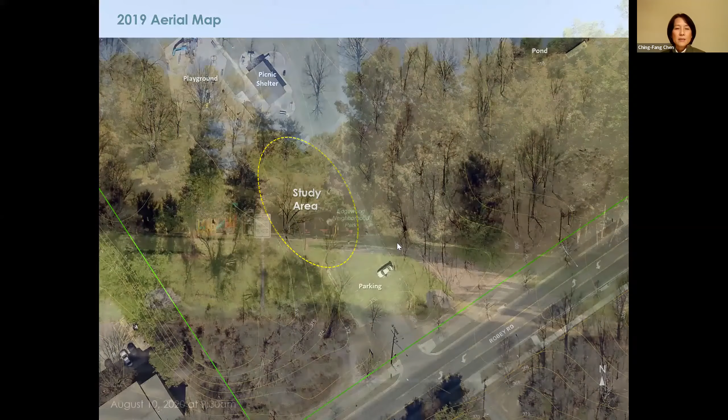This area is flat and open and is near the park main entrance and parking lot with picnic shelter and playground and the main walkway nearby. It was identified as a suitable site to introduce a community garden. And north is up. This is a summer morning photo of the space.

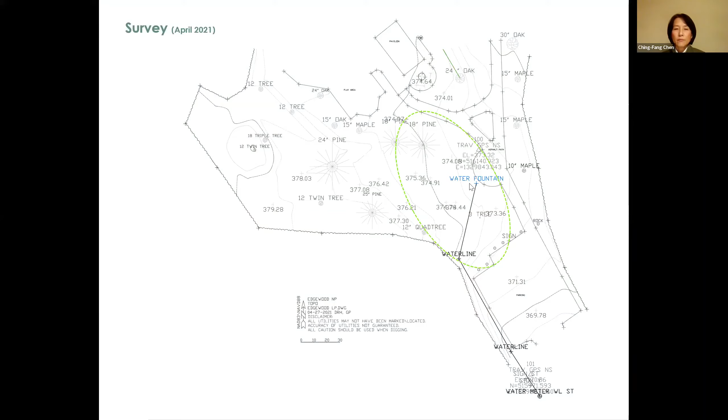This is a survey. As you can see, there's an existing drinking fountain and the water line. The overall area has about 4 feet of grade change. And there are a few insignificant trees surrounding the area. And the plan is to remove the 2 white pines that are in decline, and also this black cherry, and to relocate the black gum to allow more sun exposure.

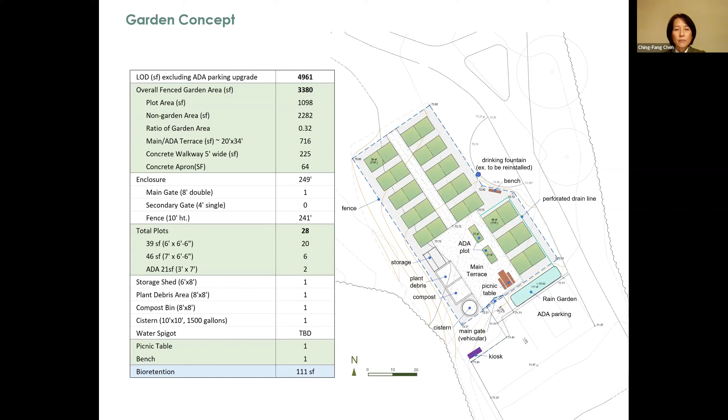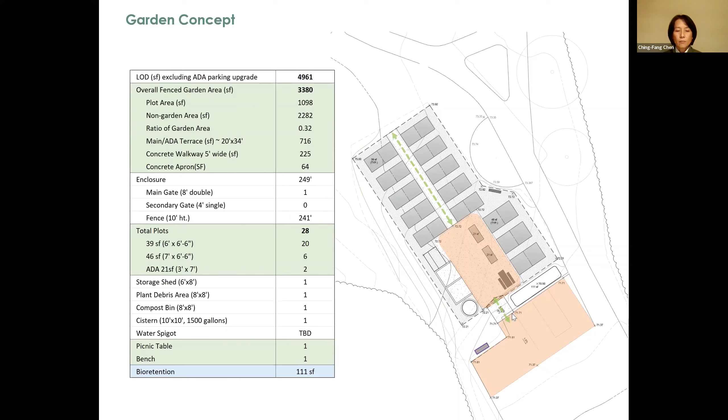You can see the orange highlighted areas are the very flat areas and organize and connect to this main walkway and the parking lot. And the design intends to allow visual connection from the parking lot to the picnic shelter.

And the intent is to use some sort of edging to contain the growing area to keep the walkway clean and organized. And the accessible garden plots can be combined or individually located with at least a 5-foot diameter turning area. So in this case, the plots are separated, and this option shows the plots are combined. It will allow us to incorporate another picnic table.

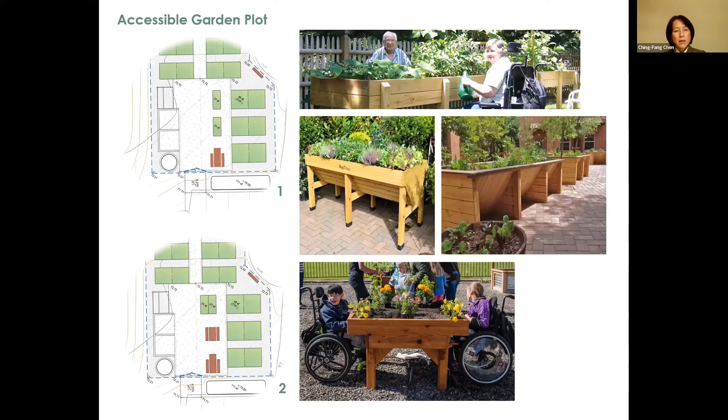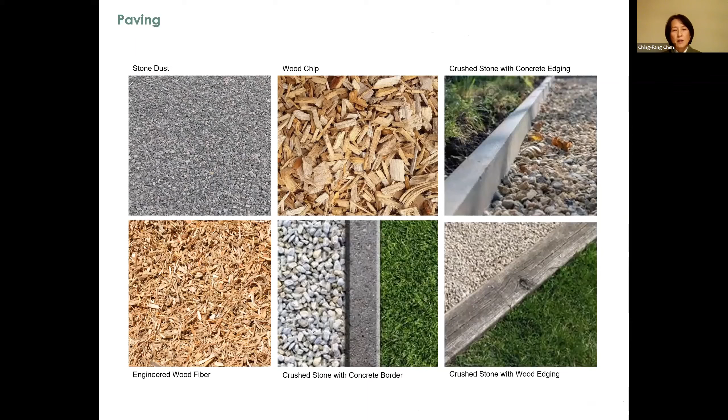And the team explored materials for paving and edging that can support day-to-day operation and are sustainable and affordable, such as stone dust, wood chip, gravel with concrete edging, wood edging, engineered wood fiber, or crushed stone with concrete border. We haven't decided yet, but these are the materials we're looking at. And for any loose material, we recommend having some kind of geogrid to provide subgrade support.

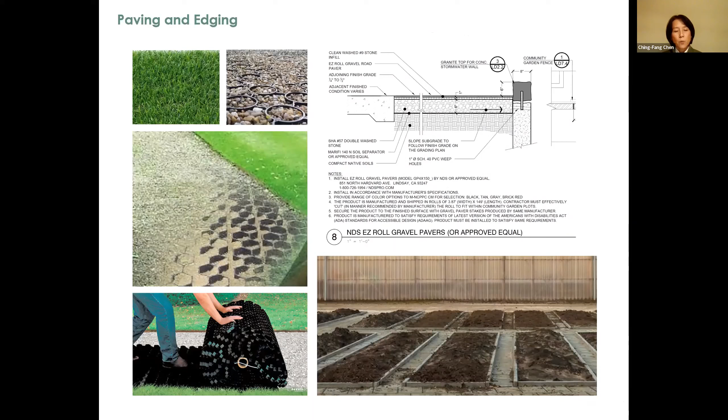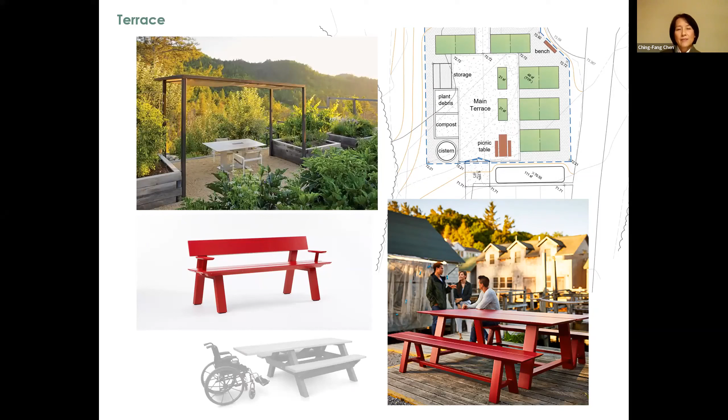And install permanent fencing that is durable and aesthetically pleasing. And a multi-purpose terrace to support the garden operation and to also provide a nice place for gardeners to take a break, to share the produce or to share their ideas. So we are now obtaining your input, and we will make refinements to the plan in the winter and complete the details next spring and hope to start construction next summer.

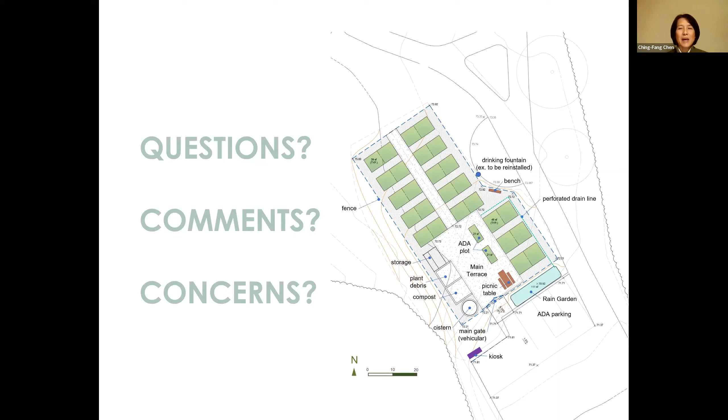My division is very excited to be able to support the community garden program by helping with the design. And the intent is to make this first designed community garden project to be like a little prototype. And so we want this to turn out nice. We want this to really enhance the park and want to encourage people to participate. So we're working together. We want to make the best out of this for your community.